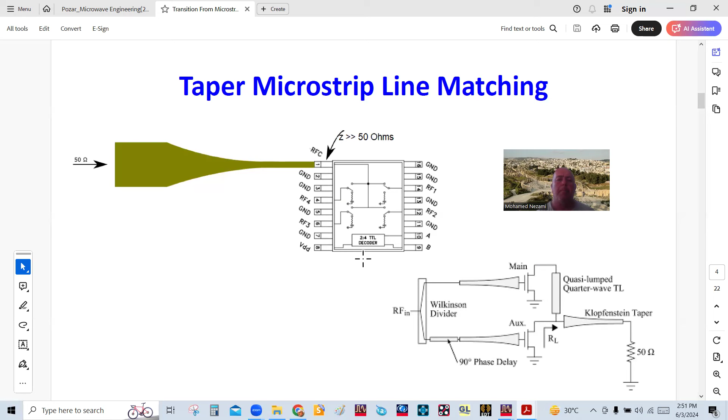So conceptually, the tapered line transformation or matching between two impedances, say between Z0 in here and R load, we need to go from here to here. We can either use a uniform length quarter wave transformer to get from this impedance to this impedance over this length in here, or we could use a smooth transition. And that smooth transition, as we will see in a moment, has several ways to get here.

Depending on how fast the roll off is coming down or going up between the two impedances, that can be described as a smooth transition using one of the conventional tapered lines that we will describe in a moment. And this usually follows either exponential, linear, triangular, or Klopfenstein, okay? Or we could utilize a step transformer just like we see here. Or we could go just one shot, one step jump in the impedance, jumping all the way in the middle here, jumping to the next one, okay?

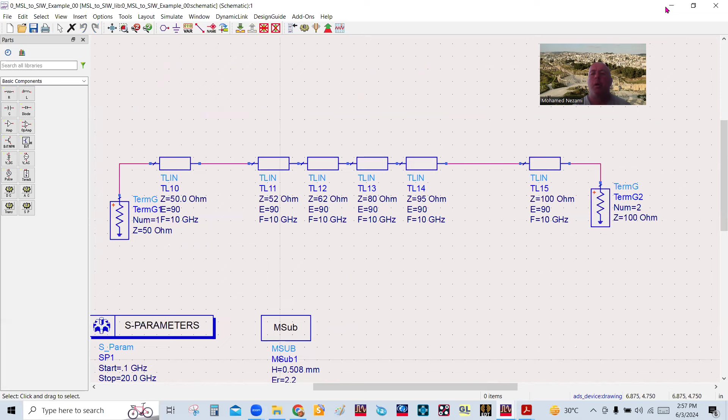So what I did today is I used ADS to do some analysis of examples, just showing you basically the trade-offs between all these classes that we have here. So we'll go to that in a moment. So let's start with the simplest one, which is multi-section quarter wavelength impedance matching.

So again, why we're doing this is because we need to get to the point where we can derive the taper, which is the taper length and the taper width, of the impedance matching between a microstrip line and a substrate integrated waveguide. So that's really what we need to do. What I'm describing today is this taper, the trade-offs between various classes of taper. Like I said in the beginning, we don't have to go smooth.

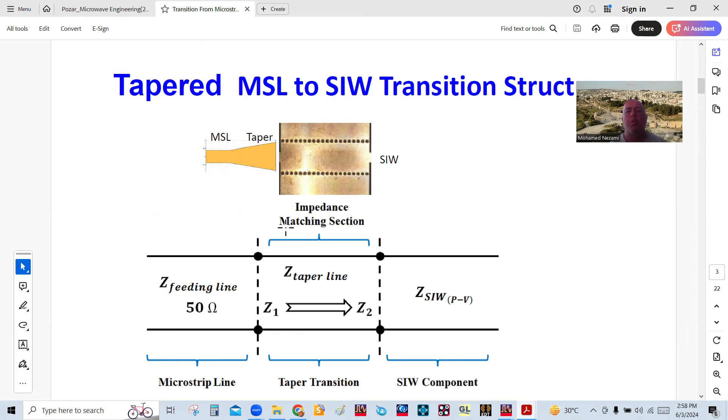So we could go to this technique in here where we do equal steps to get from Z1 to Z2. That is because we want to get from the impedance of the 50 ohm line, for instance, to the SIW. This one is pretty simple to draw. As you know, you need to draw this for PCBs and analyze it, so you have to do it in HFSS or some other package.

And if you want to do a smooth taper like these, you have to draw it mathematically. A lot of engineers find it difficult to implement this in HFSS, although it's not really that hard. Whereas the step one can give you comparable performance, and it's pretty simple to implement. So if you're doing multi-step quarter wave transformation between two impedances, which is the blue line, we have two choices: binomial or Chebyshev.

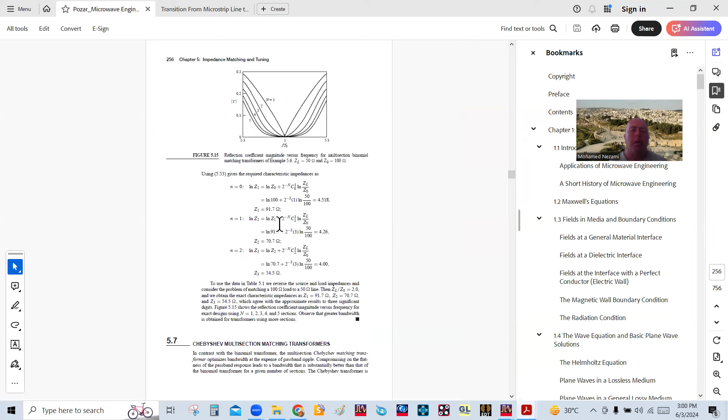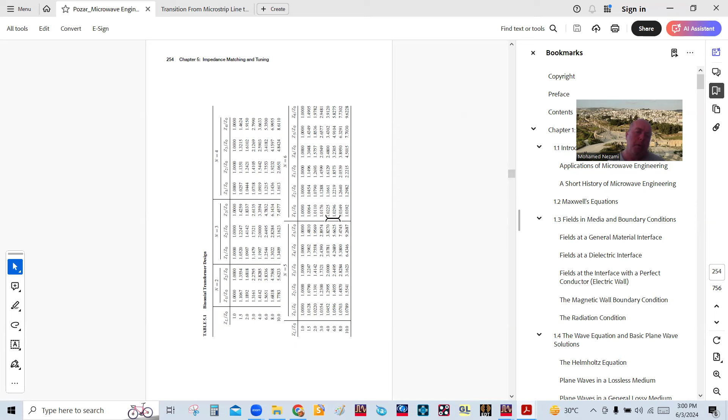Now, Pozar covered this really well. Let's go to page 240, I think. Here, the quarter wave transformer. He describes all of the aspects of this. He even gives you the tables for Chebyshev and binomial, and some examples. Here's the Chebyshev, and the other one was the binomial.

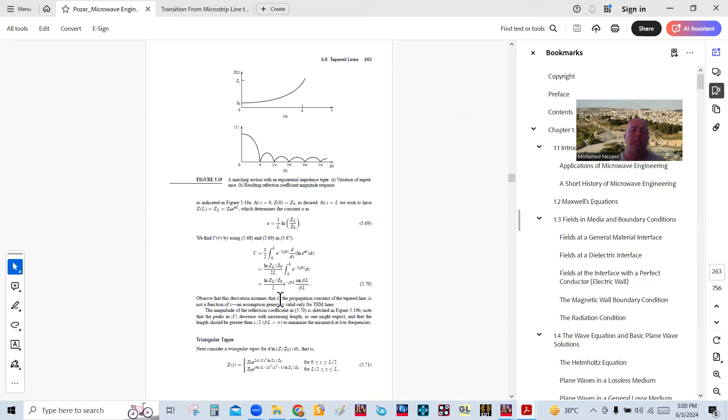And then he goes into the tapered line, and that's where he covers the Klopfenstein taper, and he derives all of that. So if you need to understand the principles, you can go to his book. Okay, so let's get back to here.

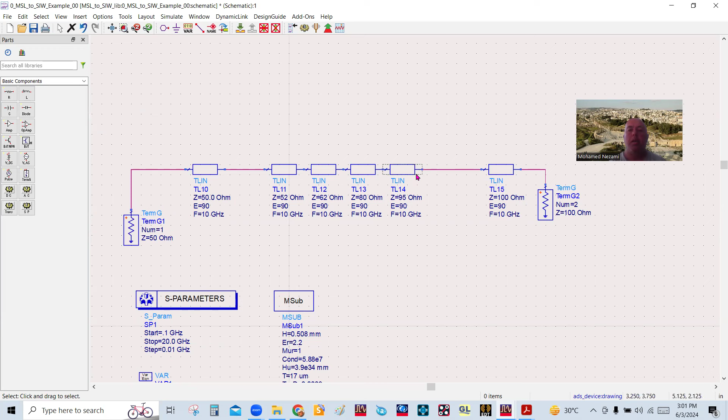So the multi-section quarter wavelength design is really simple. They give you these tables, whether you want to go Chebyshev or binomial. Let's talk about this example. I have a 100 ohm load and a 50 ohm source at 10 gigahertz, and I want to match using 4 sections of transmission line. I forgot what I did here, but we'll go in a minute.

For Chebyshev and binomial it's very similar. The first thing you determine is the order, and then the ratio of Z load to ZG. Let me magnify this. So we have the load to characteristic impedance, which is this piece here. Here's the source, small section, and here's the load. In this case, I'm matching using 4 sections.

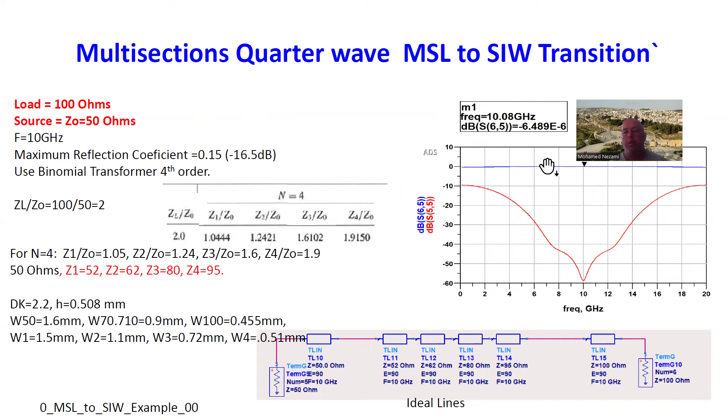These are 3 sections. So for instance, if the load is 100 ohm, well, let's just go to the example. Here it is. So what I'm trying to do is match between two impedances, in this case 100 ohm and 50 ohm.

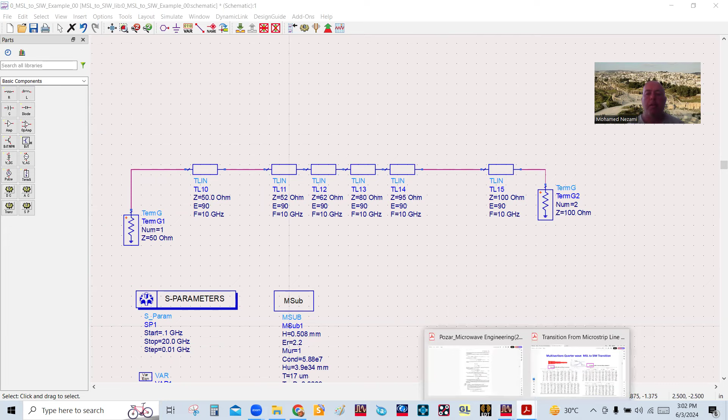So I've got an extension of the 100 ohm in here, an extension of the 50 ohm in here, and this is 4 sections of this here, which in this case is for using the binomial transformer. So I want to do a binomial transformer, 4 sections, matching between 100 and 50 ohms. The ratio, 100 over 50 ohm, of course, is 2.

So you come in here, Z load over ZO, which is 2, and then you go to the section that has 4, and in this case it gives you the first quarter wave section, the impedance Z1 is really 1.04 times ZO. And that's understandable. Because it's tapered, we have to start very close to 50 ohm, and then we have to finish close to 100 ohm, and that's 1.9, which means Z4 over ZO is almost 2, which is 100 ohm. And that's basically what we have here.

So you calculate basically all these impedances, all these ratios, and then you come up with these impedances. First you start with 50, that's your source. You got 52 ohm, then 62, 80, and 95. And then you've got a section of 100, and then the load is 100. So using ideal transmission lines in here, we can actually...

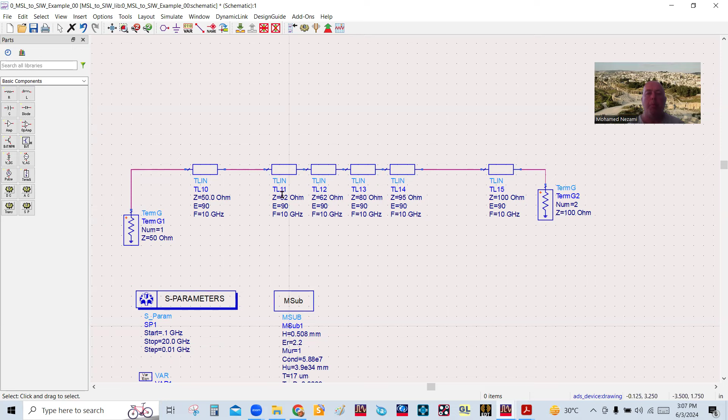So we've got the 4 sections. Each one of these is 90 degrees at 10 gigahertz. And then I put the impedances. I calculated the impedances based on these entries in this table, and I put them in here. And then I simulate it, and that's what I get. So it works perfectly, it looks good, everything is fine. So we did verify this.

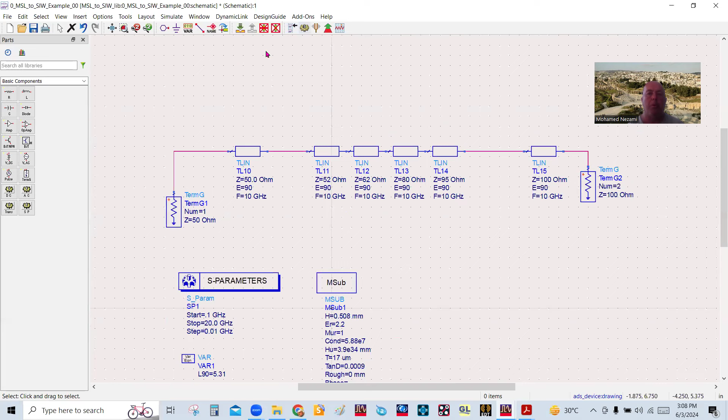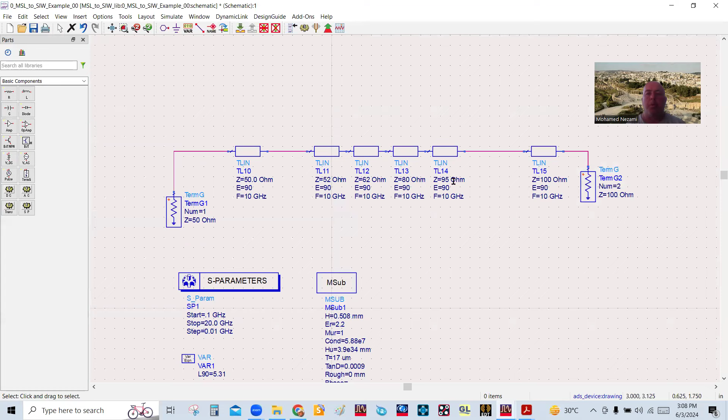Now, the next step, you have to implement this using microstrip line. But first of all, we've got these here. If you want to simulate this, you just go like this, and basically this is what you have. So get a marker somewhere in there, and that's what we get. Of course, this is using ideal 4-section transmission lines. So the next thing we want to do is transform this to microstrip lines.

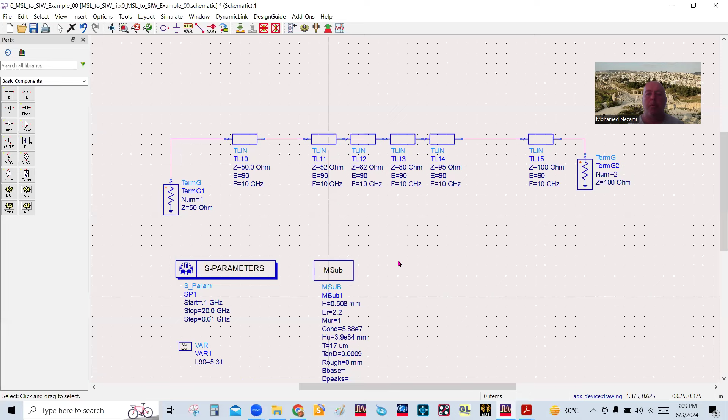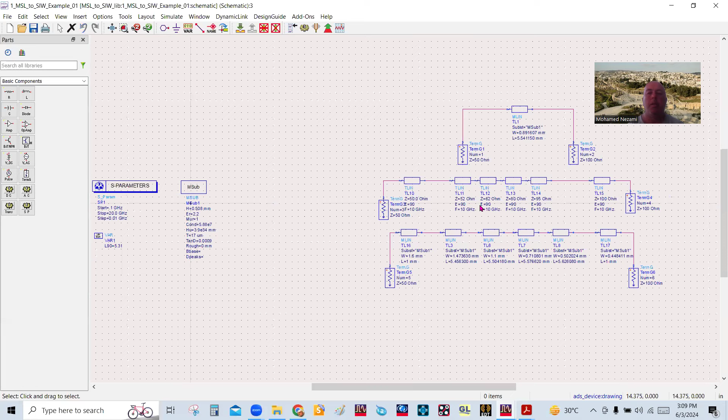So I have a substrate, which is this substrate in here, and this substrate is a Duroid 2.2, half millimeter height. So we want to implement all of this in microstrip. So I go to ADS. Let me open the other file that has this. Okay, so I went in and put the substrate. Here's the substrate that I need, and this is what we have.

We need to get these impedances, 52, 62, 80, 95, into microstrip lines. So we go to tools in here and run LineCalc. We start LineCalc, and we come in here. For instance, let's say that I want to implement the 95 ohms. So here's 95, and of course 90 degrees, using these substrate parameters at the frequency of 10 gigahertz.

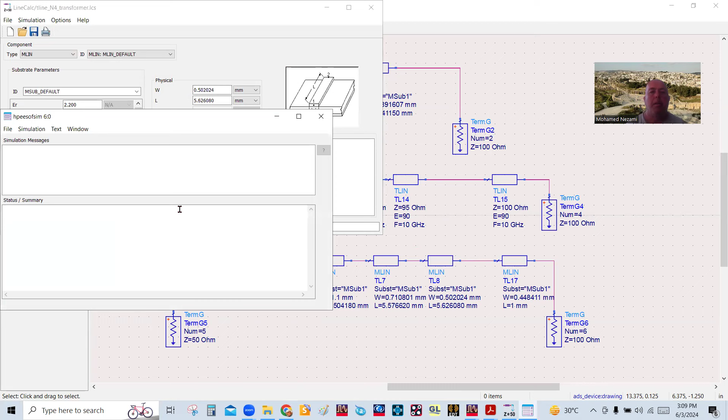And then I hit synthesize, and basically here it is, a half millimeter, and that's what I got here, as you can see. So I grab this line width, and then I put it in here, and of course the length in millimeters is also this. And you go one by one and do this on all of them.

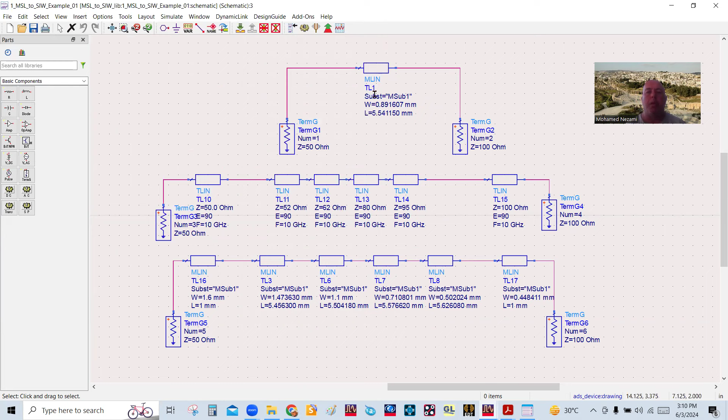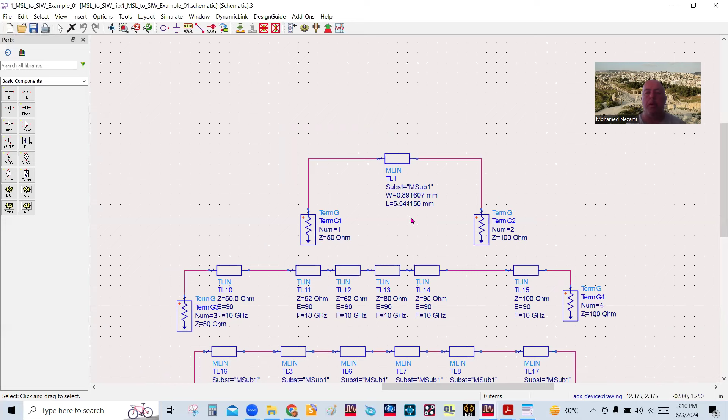So I did this, and at the same time I put a section which transforms 100 ohm to 50 ohm using a single transmission line, a quarter wavelength line. So a single transformer now versus 4 orders. And then when I run this, basically this is what I get. So you can see here, let's zoom in a little bit here.

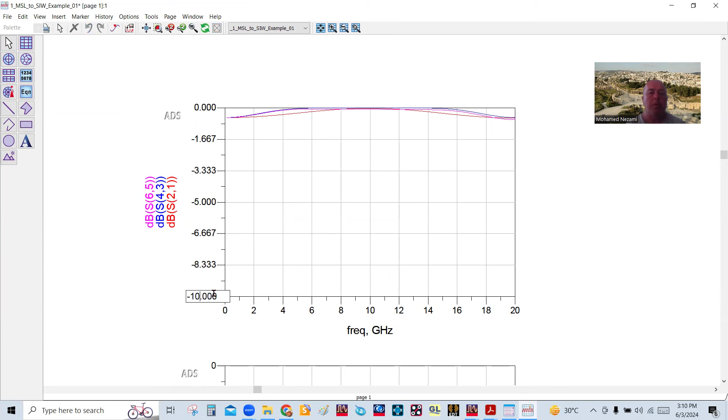And let's go here, 0. And let's go here, let's say 2. So we can see really close in on the insertion loss. And you can see this is what we get. So we've got the single line, the single transformer is this here.

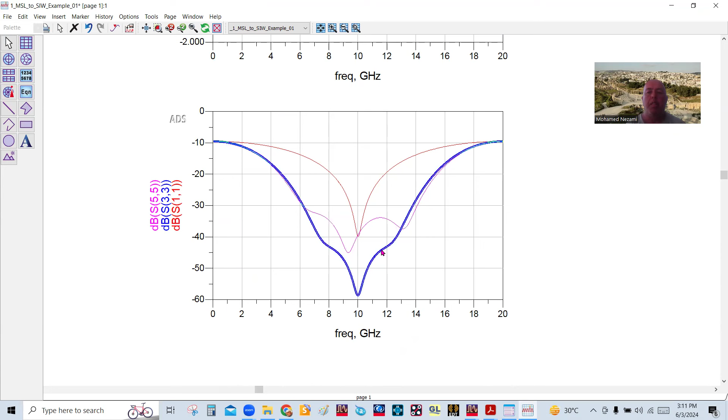Okay, I've got the 4 section transformation is here. It's pretty good, very wide bandwidth. And the theoretical ideal one is here. Okay, so this works very well.

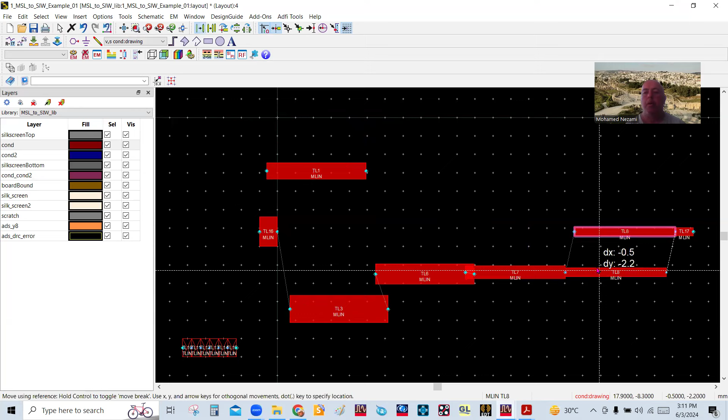And then of course, you can show the layout of this. So go layout in here, and then got the layouts here. So here's one section, and here's the 4 sections of the transformer in here. This is the little 100 ohm, and this is a 50 ohm extension. Okay. So this is basically if you were to design this using a binomial transformer method, okay?

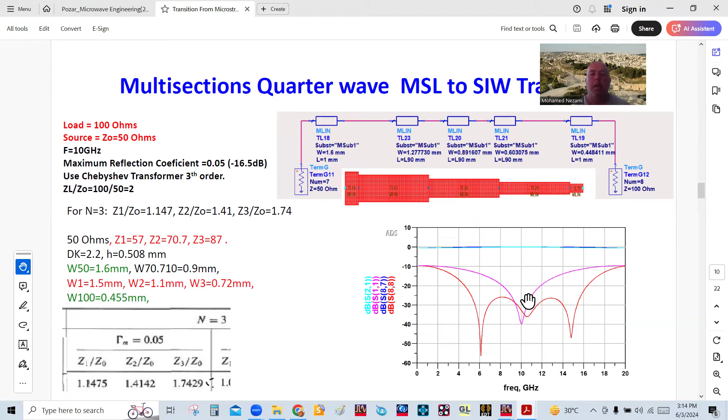So you go to LineCalc, and one by one, you can actually synthesize these lines in the substrate that I'm using, which is a DK 2.2 and height of 0.508. And this is what I got, okay? And let's go and see that. So we're going to go to this one here, hopefully. Yeah, here it is. So we've got three sections, okay? The impedances are given all in here, same substrate, and I still have the single order.

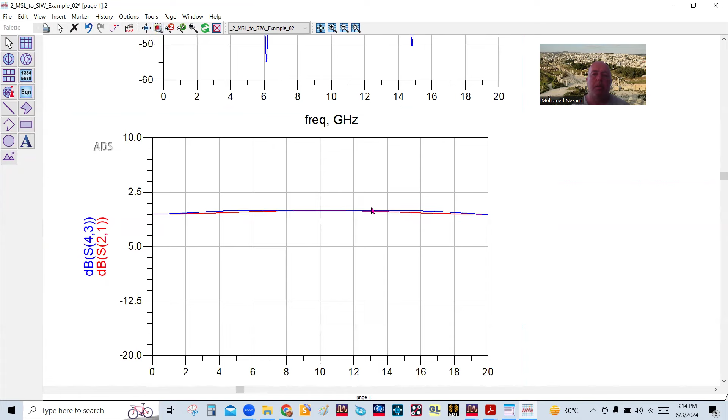Synthesize that, and boom. So here's a single order one, okay? And here's the third order one, both the insertion loss and the return loss. So let's look here. And you can see that here, okay? All right, so that's what we have.

So of course you do the layout for this, just to see what it looks like. This is what it looks like, okay? And this is the single section, of course. Okay, so let's go further. Next, this is just a comparison of the first order and the third order. You can see the comparison in here. Okay, so let's see if I still have that file.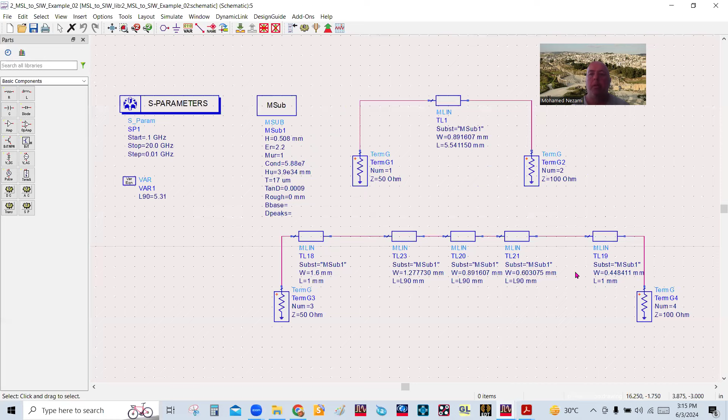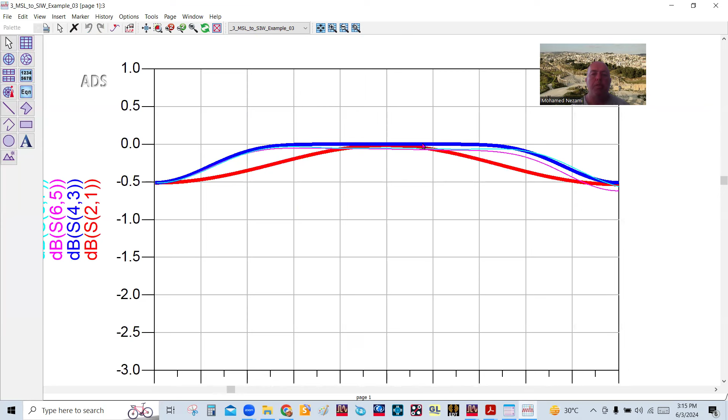So we can come to here, and what I have is the ideal one, and then the first one, fourth order, and the third order. This is Chebyshev, this is binomial. And let's do the simulation. Okay, you can see the comparison of those here, and you can see the insertion loss as well. This is a single order, and these are both of them. So very similar. Okay.

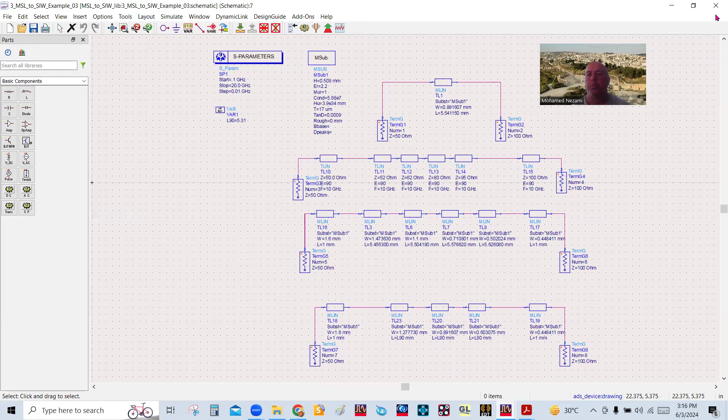And the layout is, of course, you know how to get that. So let's save time and move on. Okay. So now next, what I want to do is, okay, so we know how to do it manually now.

So the way to do multi-section quarter wave step transformer design is based on these tables, okay? The tabulations for binomial multi-section matching transformer and the Chebyshev multi-section matching transformer. So all we need to do is get the order, and then get the Z load over Z naught, and then look up the terms, and that's your impedances, and then you go to a microstrip synthesizer program, LineCalc or something else, and then synthesize all these lines to your particular substrate.

So, but look, computer aided tools are available. So why don't we just then use ADS? Well, ADS turns out that it does have a library of tapered line sections, and let's just show you how you do that. The first one I want to do is to look back on this line here, on this tapered transmission line.

In a lot of cases, practicing engineers don't have time to do like a thesis out of this. This could be a job that you have to turn in in an hour or in minutes sometimes. So you got your 50 ohm line in your substrate, and you've got the SIW, and numerically you calculate what that line should be. Or you can find the impedance of this substrate integrated waveguide. So you could use just a single order linear transformation, and that may work very well for you in a lot of cases.

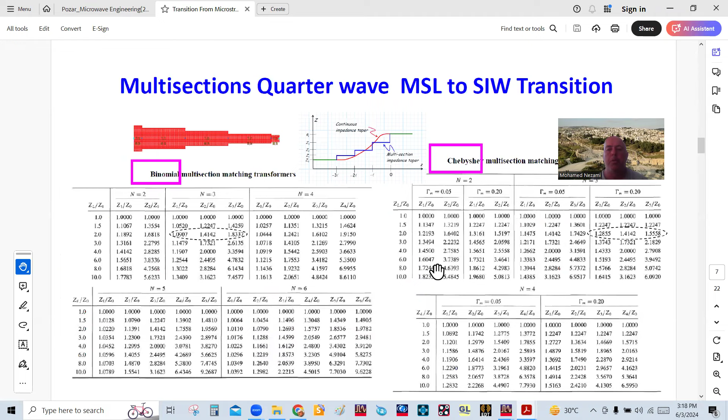So to do that, ADS has got this symbol, which is MTAPER, okay? And all that is basically is a transformer, which is that first one in that table here. Let's see the linear one. We didn't describe the linear one in here. Sorry. But it's a linear transformer that transforms impedance where when the length is 0, basically the input impedance is Z1, and then when the length is equal to L at the end of the line, the impedance is Z2. And this works out well.

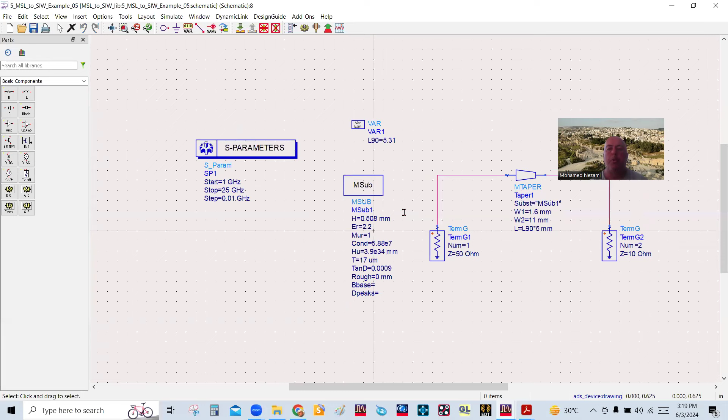So what I'm going to do here, for instance, let's say that I have 50 ohm to 10 ohms, okay? I put in this line in here, and this is available in ADS. Okay, so let's look in here. You go in here to the microstrip library. Okay, so we're going to go to Microstrip. You can pick a taper line out of this right here, like this example, and then you can actually do this. So actually, that's a smart one. The other one is in the other directory, but in any case.

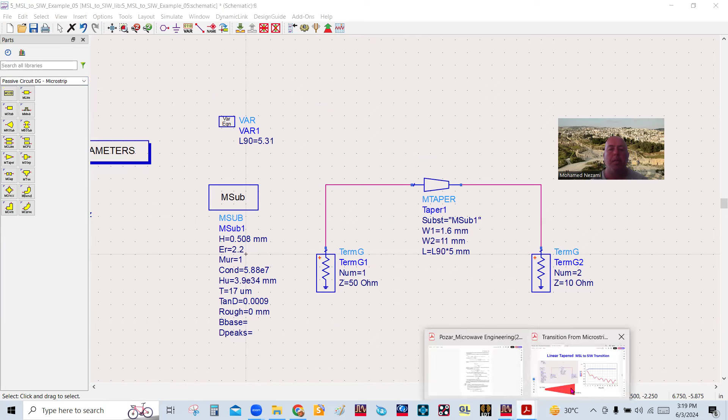And when you look at this, all you need to do is specify the width 1, the width 2, and the length. If you look at the help file on this, it gives you all these parameters that you need to specify. So it's pretty simple. You have your width already on the microstrip line on the other side, and then you need the other load, which is a lower impedance. So all you need to do is specify these 3 parameters, and you got yourself going. And that's basically what I did here as an example.

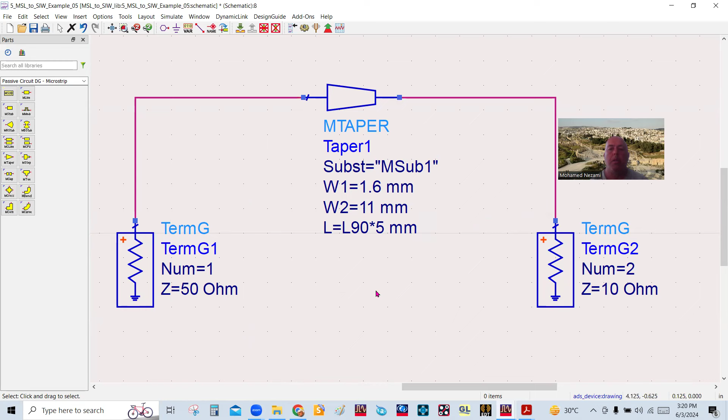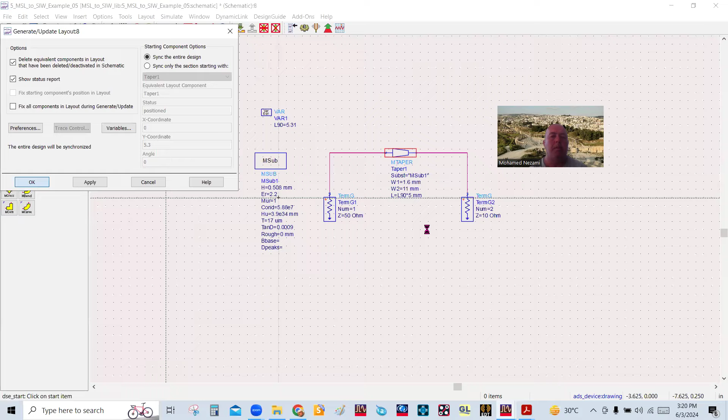I have a 50 ohm, which is width 1 in this case here, and I have a width 2, which is 11 millimeter. And what I want to do is the matching between these two, and you can run these and find out, like this. And if you look at the layout of this, it's like this. So that's basically doable. So you can go to layout, and here it is. So basically you could just copy this from your schematic capture into your PCB, and you're done. Okay, so that's one way to do this.

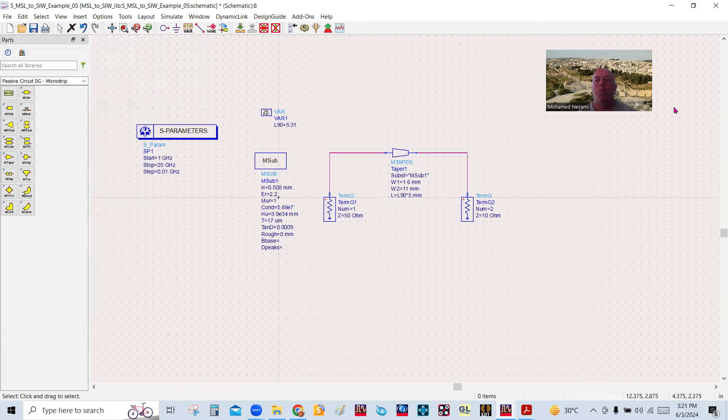Okay, so now, like I said earlier, we can do the multi-section quarter wavelength computation of the impedance required. We can design it using tables, which are available in this case in Pozar's book. So you can go to Pozar's book, and they have these tables.

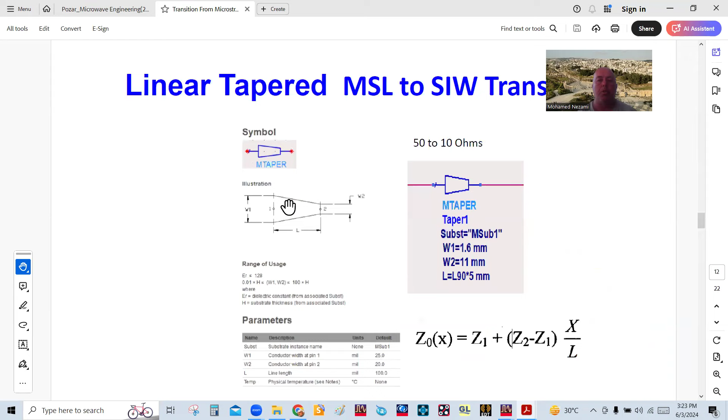But ADS also gives us this component in here, which is a smart component. And you can use the design guide to design this multisection quarter wave transformer. All you have to do is come in here and specify the frequency, the fractional bandwidth, the load and source, the number of sections, and then the topology, whether it's Chebyshev, uniform, or binomial, okay?

They even got one additional choice, which is uniform. In Pozar's book, we only have binomial and Chebyshev, okay? And then you can actually design that. That's what I'm going to show next, so let's take an example. I've got a load, which is 10 ohm. I've got a source, which is 50 ohm. And I want at 10 gigahertz to use 7 sections of a quarter wavelength line and design it.

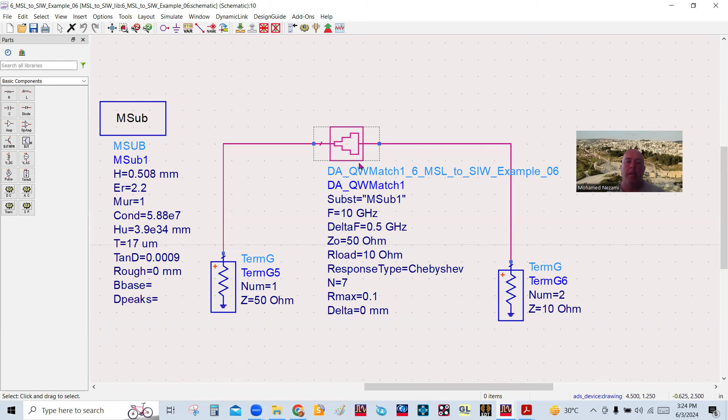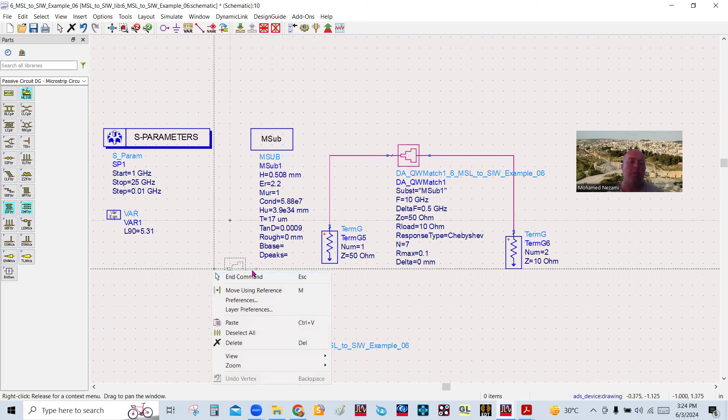And this is here. This section is available in the design guide components in here. So you go to passive circuits, design guide, microstrip circuits, and we have it right here. There it is. So you can use this. And again, I give you what the specifications are. So let's run this.

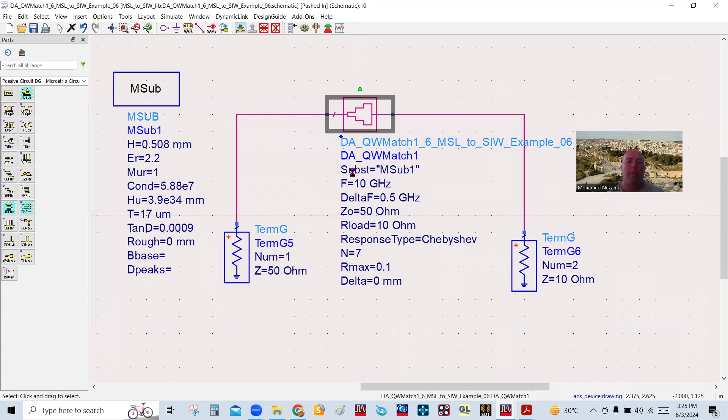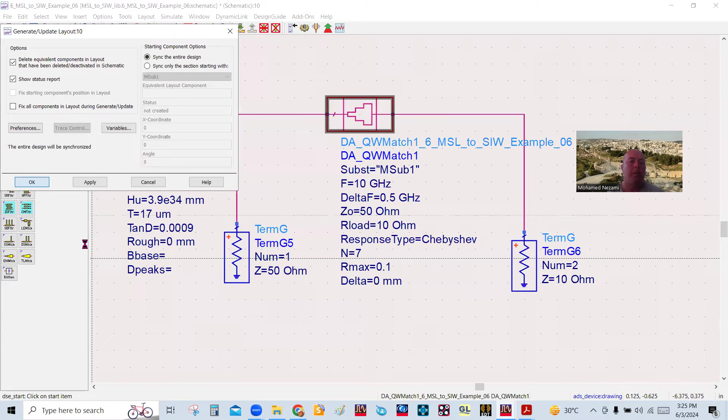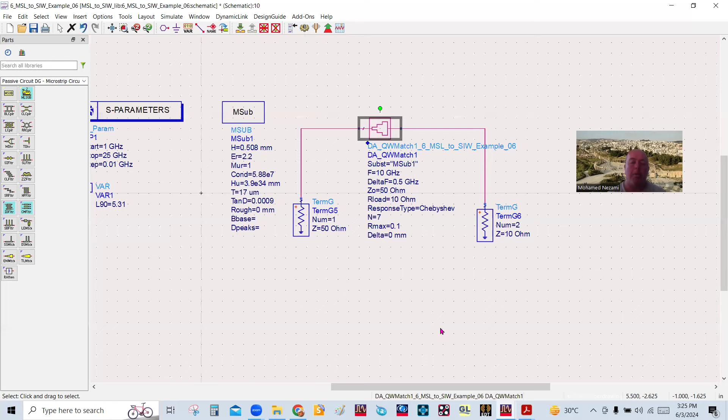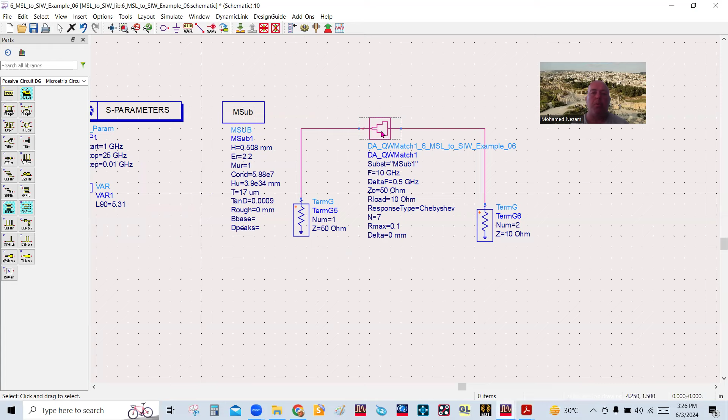So let's get back to this again now. Let me show you one thing. This one here right now is specified for Chebyshev, okay? But you can go in, and this field in here gives you a choice of doing it the other way. So you can do binomial or uniform, okay? And so let's see what I did next.

Okay, let's do a Klopfenstein. So now let's go to the smooth transition topologies table. According to the table I have here, those are basically exponential, triangular, or Klopfenstein. So we're going to look at these three types. Like I said before, depending on the electrical length between the source and load that you're trying to match, you can make a smarter choice of which topology to go with, Klopfenstein, exponential or triangular.

I'm not going to pay attention to the other two, because, as you can see, the return loss is not really good on the other ones, but they're mentioned in the IEEE publication where I grabbed this from. So again, let's do one design. For Klopfenstein, ADS gave us a way to design with this. So we're going to go to that example.

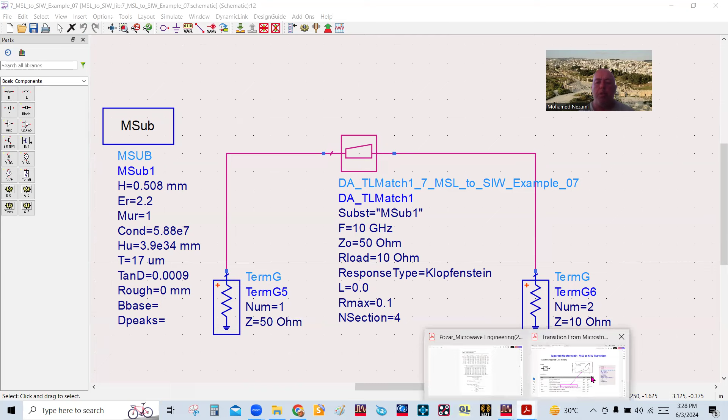Oh, by the way, I forgot to mention one thing. When you go to this table, if you're trying to do this manually, as you can see in here, Z load over Z0 is always greater than 1; these tables are for ratios greater than 1. What if the load is lower than the characteristic impedance, so these numbers become less than 1? Well, it turns out you do the same thing, except you reverse it, okay?

So make it 1 over that, and then just reverse the order of the lines in here, okay? It's good that I didn't forget that. Okay, so we're gonna do Klopfenstein between 10 ohm and 50 ohm. And that's what we have here.

So I did it at 10 gigahertz, okay? And if you simulate this, here it is basically. Pretty good, and everything is fine. Now the layout, if you want to look underneath this, here it is. Now in this case, by the way, I specified the order of this, which is 4, a low order, okay? Just so that for the specific bandwidth that I'm trying to do, that was sufficient.

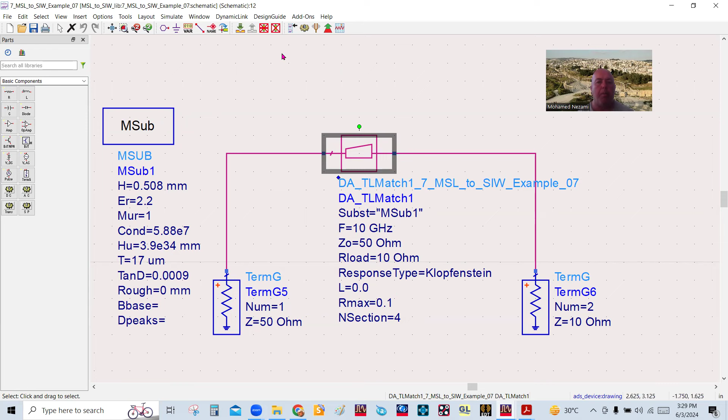And these are the lines that you can see in here. And you can see the width, how it transitioned between all of them, okay? And if you look at the layout of this, of course, it's an interesting layout, and here it is.

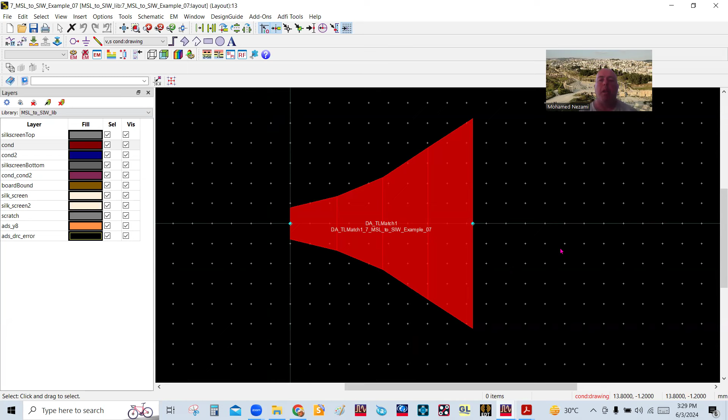Now, if you're trying to include this into your 3D EM modeling, if you don't want to do it in Pathwave, you want to transform this either to HFSS or CST. You could either export this as a Gerber file or DXF and then import it over there, or you can just draw it mathematically. And to draw this mathematically, HFSS has a method of drawing this function mathematically, okay? I'm not aware whether HFSS has a library for these transformers or not, but this is doable.

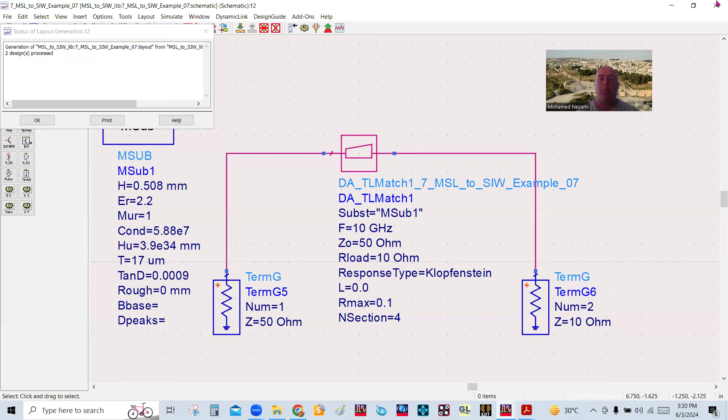Okay, so let's go then try the exponential one. So we went in, same circuit, except what I'm going to do now is choose exponential, and that's this here. Same thing again, if you run it, this is what you get. It's pretty good, a little different, of course.

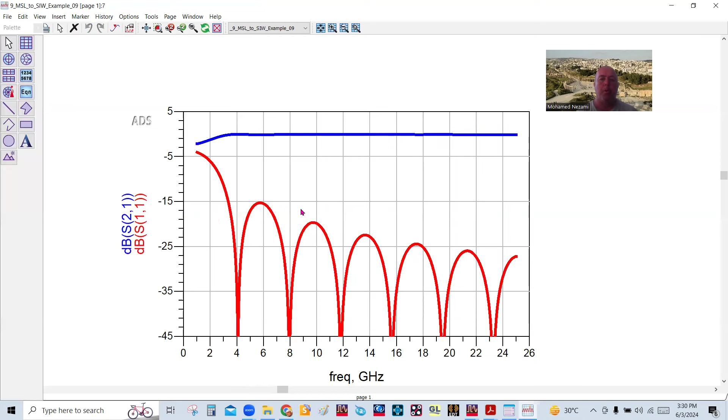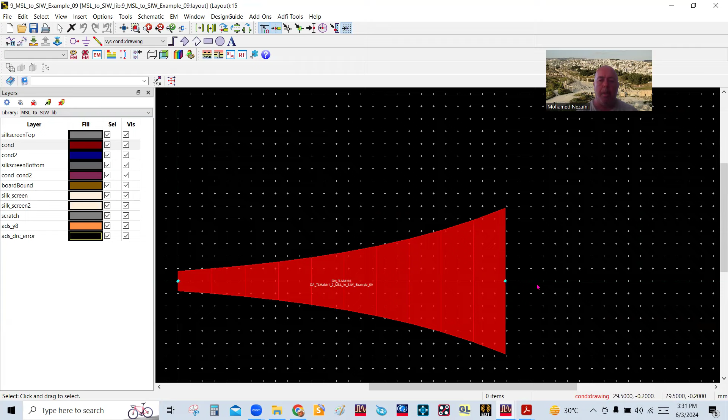And then if you look at the layout, it's also different for this because this is exponential. There you go, you can see the shape of the exponential in here. On this side, it's a positive parabola, and this one is the negative parabola, along the x-axis. Okay, so again, like I said, this has a few choices. So we can go try triangular, and then we're going to compare all of them together.

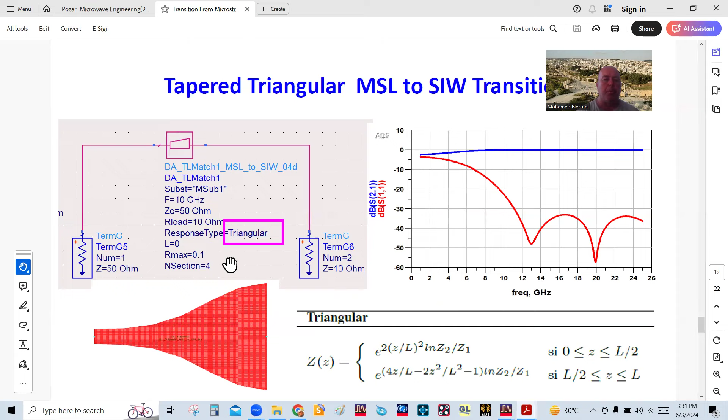So here's a diagram showing all 3 of them. And here's also the layout. And you can see that there is a trade-off between the orders, although I may have given them different orders in this case. Let's see, this is 4, this is 4, and this is 4. Actually, it's the same order. They're all the same order, except now you can see that the lengths are different. The exponential is the longest one. All right, so where did I do the comparison?

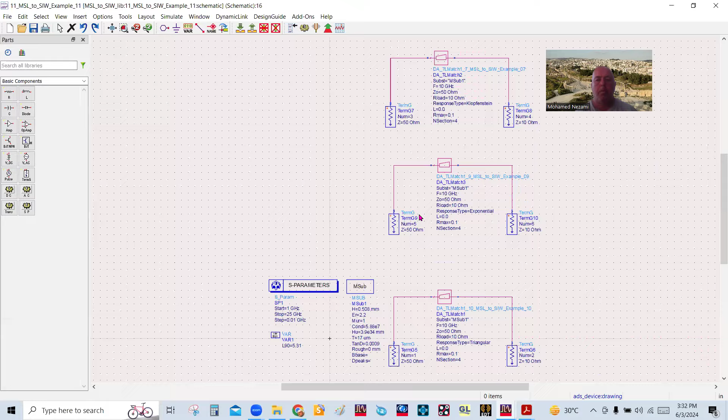Okay, so I put all 3 together in here, and if we run them all, that's what you get. So you get close. This was designed for 10 gigahertz, of course, and you can see that the resonance in here is around 10 somewhere. So you can see that there is definitely a trade-off between them.

Now, let's get back to what we started talking about. The concept was that we really want to do an SIW to microstrip line transition. But we ventured off and did a little exploration of the tapered line design. So there are different ways to do the gradual transformation of the impedance between the characteristic impedance of the input line and the waveguide, the SIW,

and that way we're aware of the different trade-offs that we can do, namely what I just showed, where we started out. We can either go with a stepped transformer or with a smooth transition. And with the smooth transition, there are a few things to consider. We can go exponential or triangular or Klopfenstein, okay.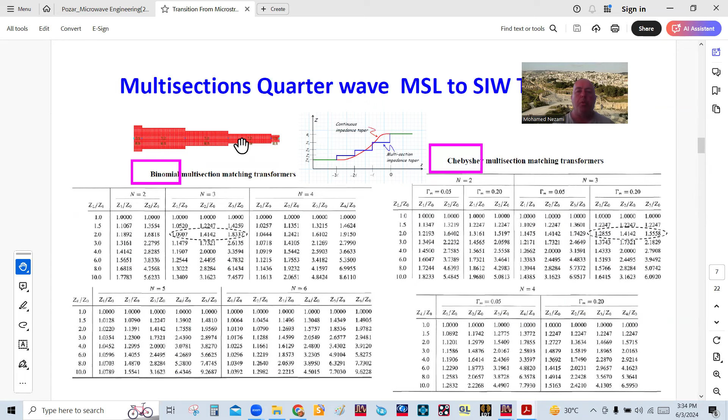And these ones, of course, depending on the length that we want to do the transformer, basically there are some trade-offs. The multi-section quarter wavelength transformers, it's very easy to design. You can go to the tables, whether it's binomial or Chebyshev, depending on the order. Now, there are ways to derive the order, but as a practicing engineer, you can just go in and start increasing the order until, with your simulator, you're satisfied with the

bandwidth requirements. Or you can go to the equations and, depending on the bandwidth, the starting frequency and the ending frequency, find out how many sections you need to fulfill these requirements. Okay, so you pick the order. In the binomial case, you pick the order, and then depending on the load to characteristic impedance ratio on the input, you find the entries, figure out what the impedances are, and then synthesize those in microstrip. Same thing you do with the Chebyshev.

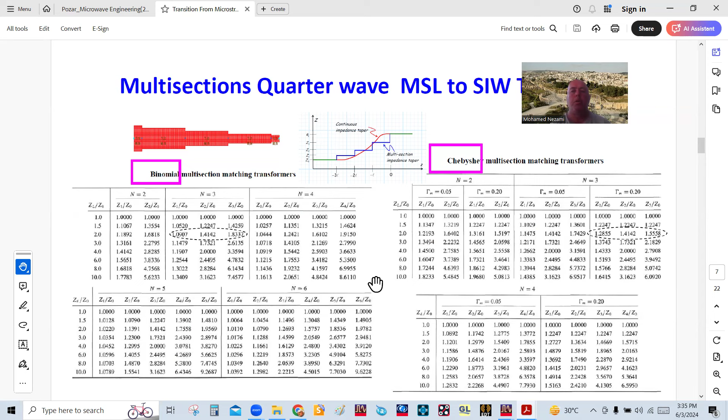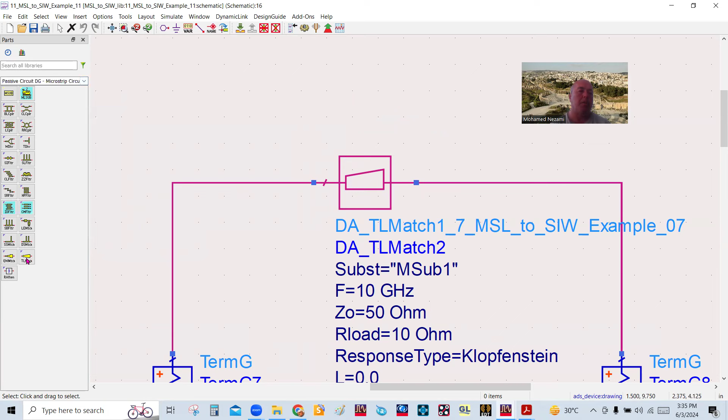So we can do that from tables, or we can do that using the ADS smart thing. So you can see, this one is where we grabbed it, from the design guide, Microstrip circuits in ADS. When you design this, you go to the design guide, and then passive circuits. And in here, they give you a controller to do the design and even simulate.

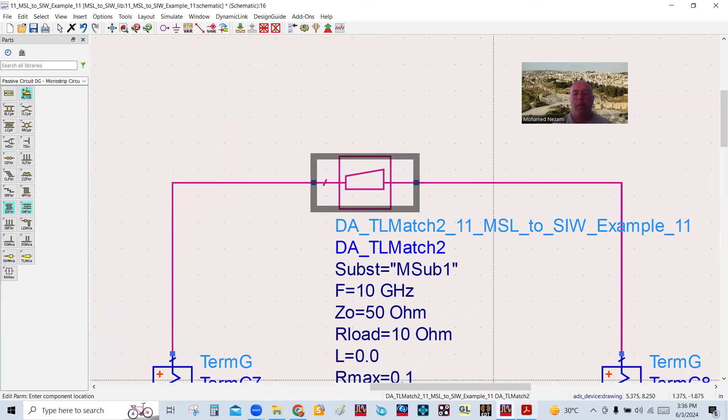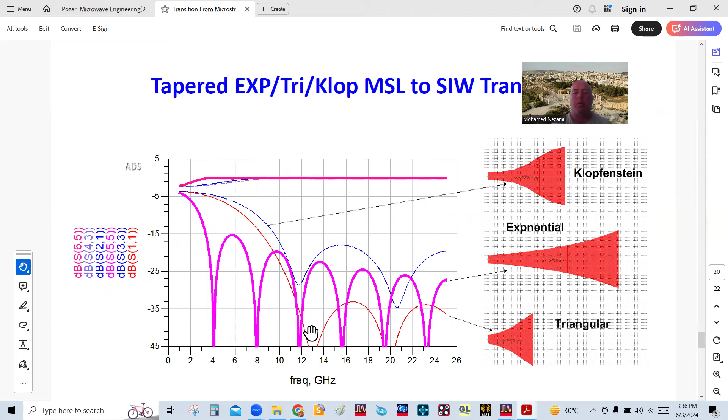So in this case, we can design it, and it can even simulate it for you. And you can work offline trying to do that as well. So then we looked at the Klopfenstein transformer versus the exponential and triangular transition, and so it's up to the designer.

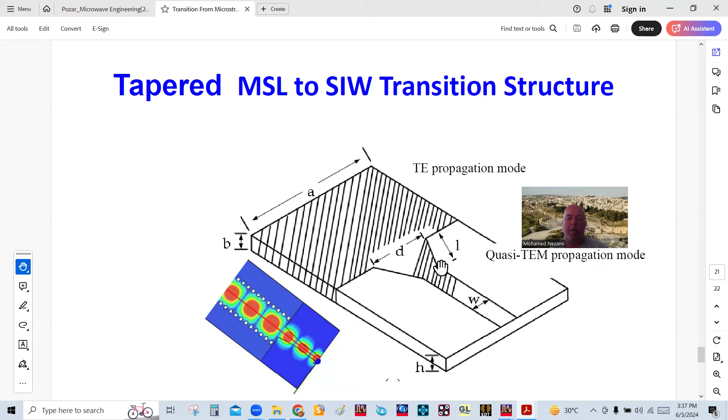Okay, so this is all I have in this session. I hope you have a clear picture now on the taper line impedance matching between two sections, and our target, of course, is the substrate integrated waveguide to microstrip line transition. So in the third part, let's zoom in on this, model it in 3D and see the trade-offs, optimizing the length and width of this taper, starting out with a solution in closed form, and then take it into HFSS and see what happens next, okay?